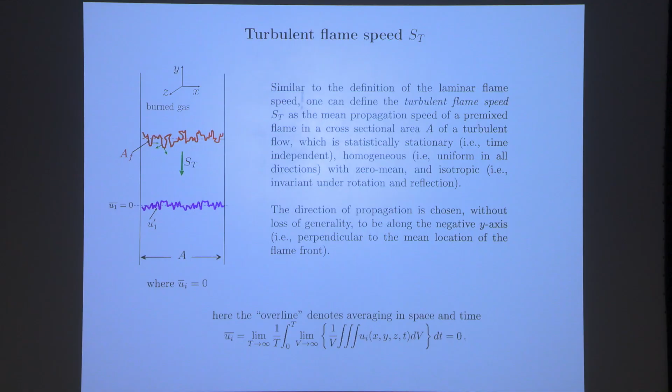So in a similar way as we define the laminar flame speed, which is the speed of a flame propagating in a quiescent mixture, where the entire structure is propagating at a constant speed, say SL, we want to define—and some of the earlier slides that I skipped raise the question—is there such a thing as the turbulent flame speed at all?

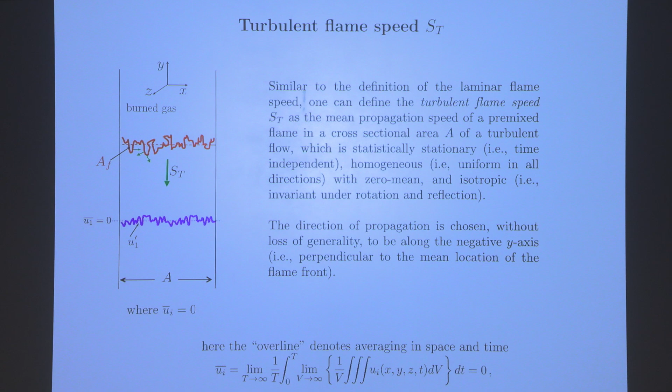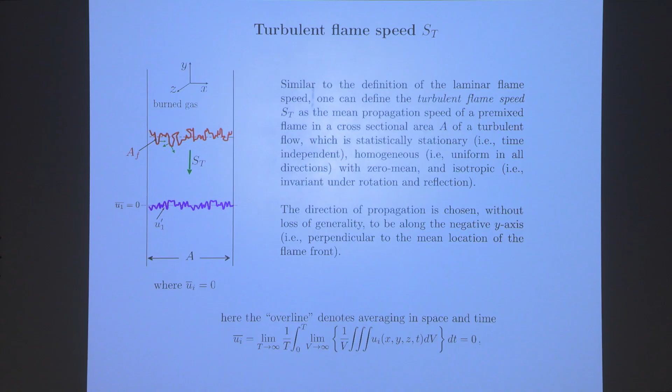But say there is, and there are some arguments given there. We want to define it as the propagation speed of a turbulent flame into something which is like a quiescent mixture for laminar condition, which will be a turbulent flow that has zero mean. In other words, it doesn't have a mean flow in the direction of propagation.

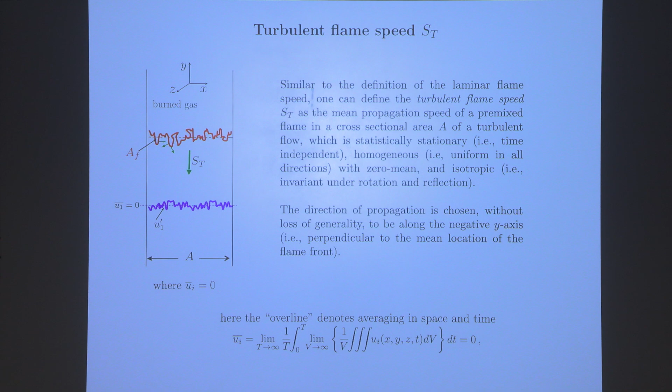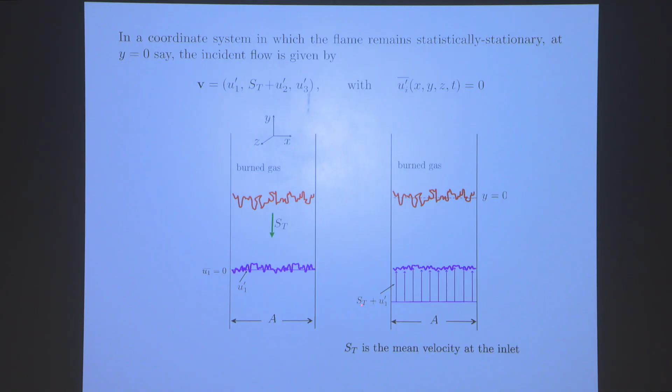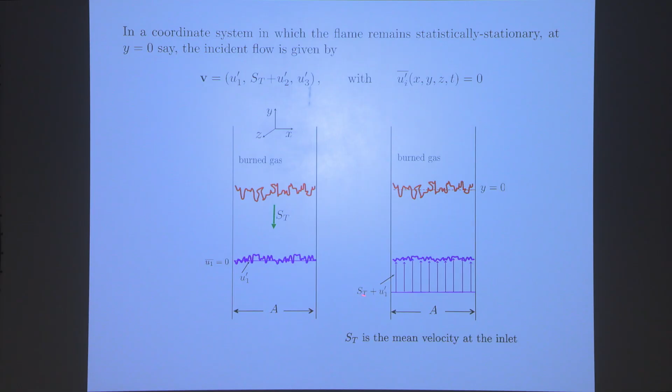And then, if that's the case, if the turbulent flame remains statistically stationary and propagates at some speed ST, we call that the turbulent speed. Or put it in a slightly different way: if the mean velocity of the incoming flow is ST, of course with some perturbation having zero mean, and if you retain the flame statistically stationary at some location y, then the mean velocity will be the turbulent flame speed.

The main idea behind which most hold up today about turbulent flame goes back to Damköhler. Damköhler, in fact, introduced the concept of turbulent flame speed and its scaling. He talked about small and large scale, and I'm going to skip some of the small scale and jump into the large scale.

So the large scale turbulence, or what we refer to as corrugated flamelet today—this is basically the idea that he proposed.

In this picture, where the turbulent flame is held statistically stationary in a cross-sectional area A, the incoming mass flow rate is the density rho u, times the area A, multiplied by some mean velocity, which is going to be the turbulent flame speed if this is held statistically stationary. So this is the mass flow rate. If this same mass is consumed...

...through this turbulent flame, then, since every section of the flame surface, say delta AT, propagates at the laminar flame speed SL, the total mass consumed is going to be the mean of all the segments delta AT—which is the mean of that corrugated surface—multiplied by the density rho u and SL, the propagation speed. So when you equate those two, you get that the ratio of the turbulent speed to the laminar speed is the ratio of the corrugated area to the cross-sectional area, okay?

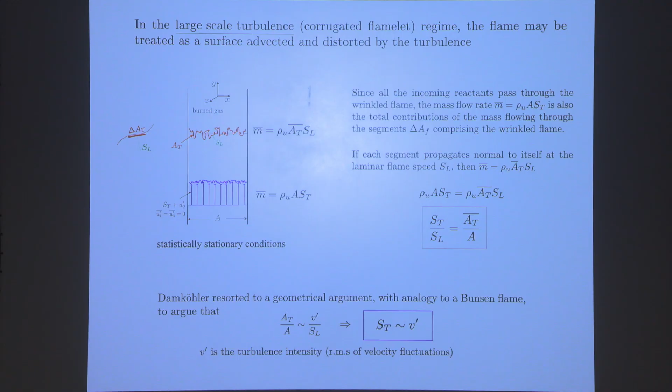So those are two points. Well, Damköhler went on to argue: how am I going to determine this in general? He made some argument based on treating every small segment like a Bunsen flame, and he tried to determine the area ratio, and he came to such a scaling.

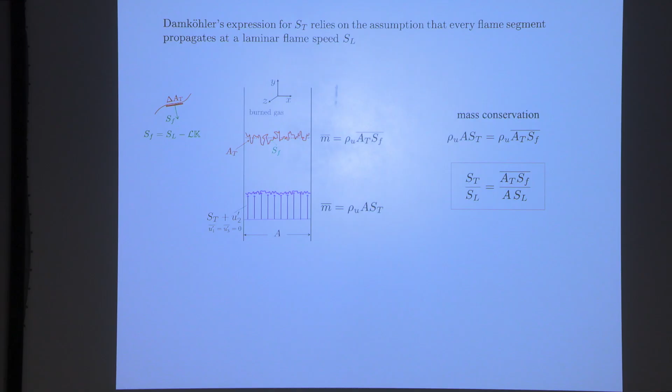And later on, Shchelkin had a different scaling. Again, I want to skip that, but what I want to say is that most of the literature thereafter tried to write the turbulent speed relative to the laminar speed, which is going to be some coefficient, of course depending on various physical parameters.

...and the turbulent intensity V prime, which is the RMS of the fluctuation velocity, relative to the flame speed, raised to some power. So for example, Damköhler's N was 1, Shchelkin said that under some conditions it's 2, some condition it's 1/2, whatever—that's the point. Okay.

I wanted to revise some of this discussion. So if we follow the same discussion as we did a minute ago for Damkohler, but now argue that the flame speed of every segment is not the laminar flame speed, but is affected by flame stretch.

So it's SF, not SL, which is affected by stretch. If you equate the two, the consumption of all those segments is rho u times the mean of the product of the area and the flame speed, which is not the laminar flame speed. Then the ratio of turbulent to laminar is the ratio of the mean of the turbulent area times the local flame speed, divided by the section here. Of course, if all segments propagated at the laminar flame speed, you obtain the Damkohler result.

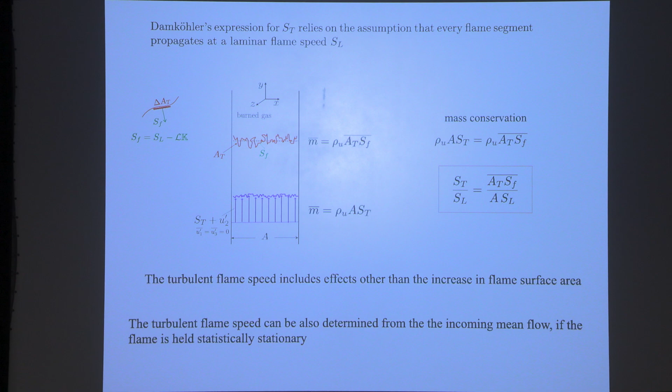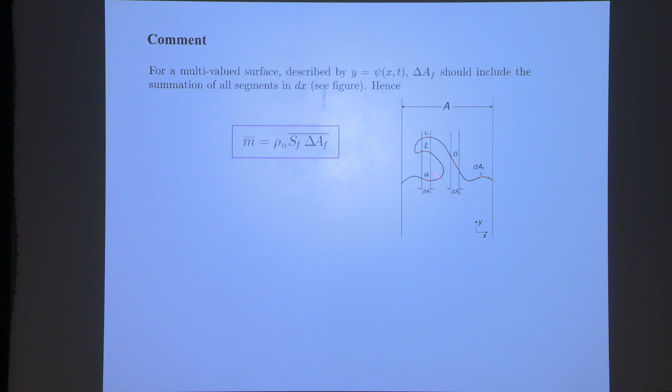Just a minor comment: if the flame is folded and so on, then when I add the different segments of the area, I have to account for the fact that for a given location, I may have more than one segment, and they have to enter properly in the calculation.

And again, I will rely on this same hydrodynamic theory. The flame is an interface, so the assumption is that the flame is so thin that the turbulence does not affect what's going on inside the flame. Is this reality? Not necessarily, but it's the model that we describe.

I am not totally convinced that it's always not the case. In other words, there is no definitive proof that turbulence affects the internal flame structure to the extent that it changes the turbulent speed tremendously. It may happen under some conditions, of course, and it's logical to expect that, but it's neither shown experimentally nor numerically that it does that. But anyway.

Different ways of arguing. In this model, then, we have the following parameters. We have the intensity of the turbulence, V prime. We have some turbulent length scale, L, which I will probably not talk about today much. And then we have the combustion parameter, which is the Markstein length and the density ratio, in this model.

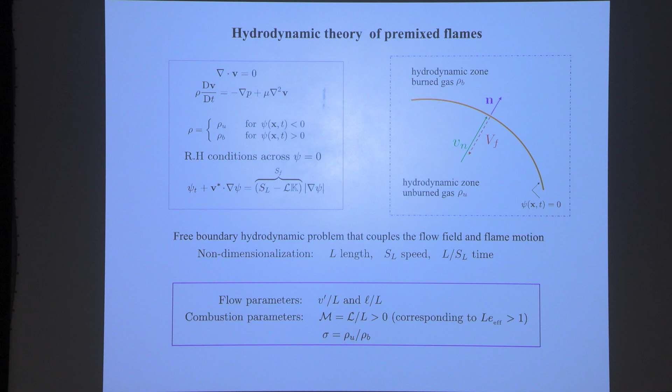Note, by the way, maybe again I failed to move on with different things, I didn't emphasize too much this. I did say, though, that the Markstein length is affected by different parameters. In fact, the nice thing about it is that it lumps all the mixture properties, diffusion properties, density ratio, into one number. That number can be changed by different things.

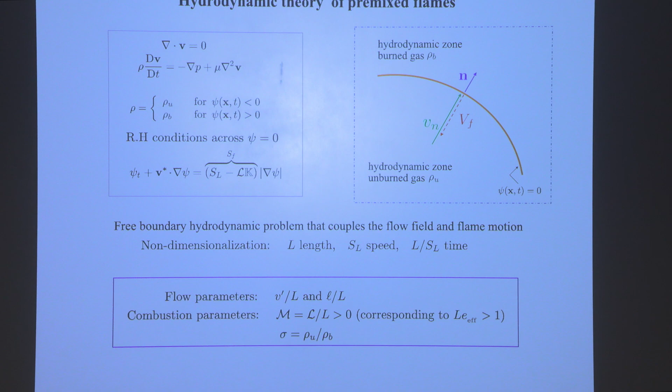So it's an important and interesting quantity, and people have measured Markstein lengths under different conditions. Some of the early ideas were that you can perhaps use them to describe a local structure of a turbulent flame, assuming that it's a strained flame, and you tabulate that, and use it as your small scale if you're doing LES or such calculation.

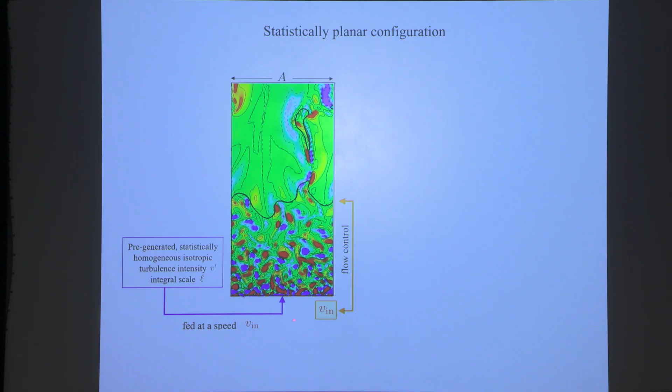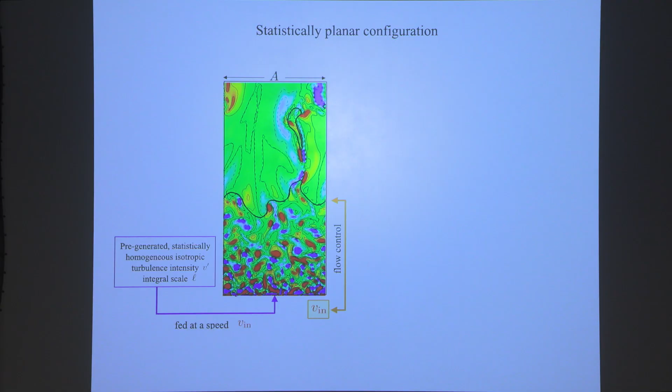So what we are interested in is a turbulent flow coming here with some feed, created independently, usually created in a long box. You create turbulence. There are different numerical methods to create synthetic turbulence, as we call it. You create a long box, and then you feed it, so to speak, into your box here at a certain speed, V inlet.

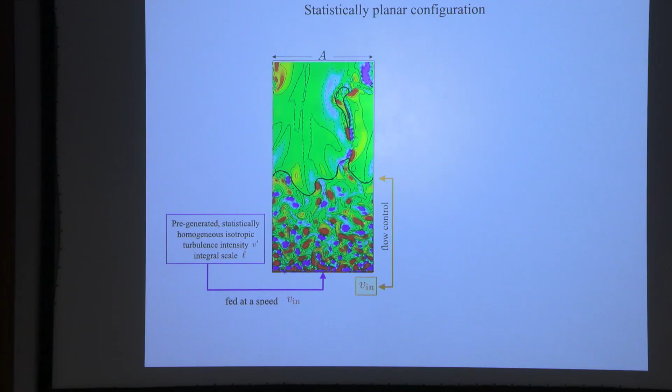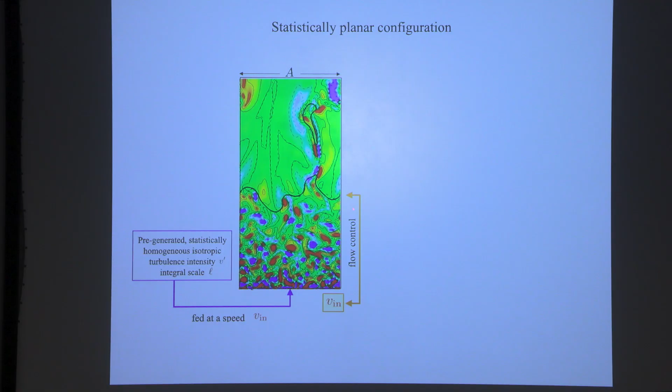And the idea is that with a flow control approach, we can control the velocity. In fact, we can also control the intensity of turbulence, which, once you generate turbulence, has an intensity and a scale, computed as part of what you have created. And you can control V prime as well with a controller.

So, for example, this is a PID controller. You see that V prime can be kept to whatever you want. This is the flame position for different V prime values. And you see that you can control it over time to keep the flame at a fixed position this way, okay?

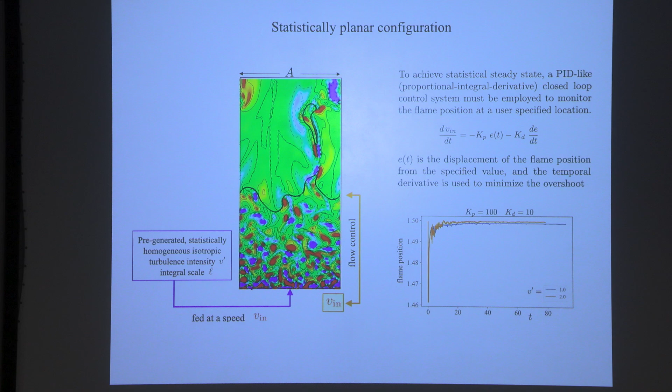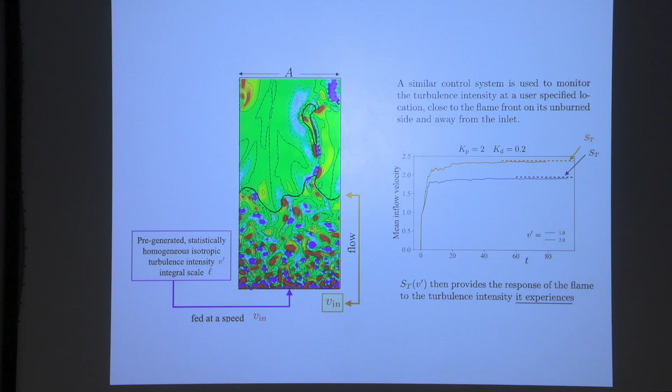By changing the inlet for different V prime, you can control the mean velocity, which eventually becomes the turbulent speed, using this controller. You can also do this in 3D, and this is the flame you can see in a 3D configuration.

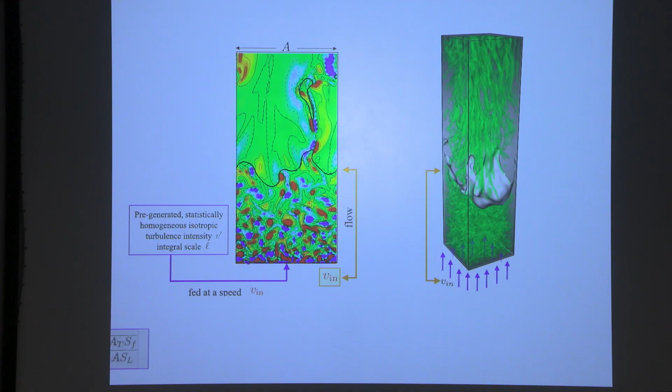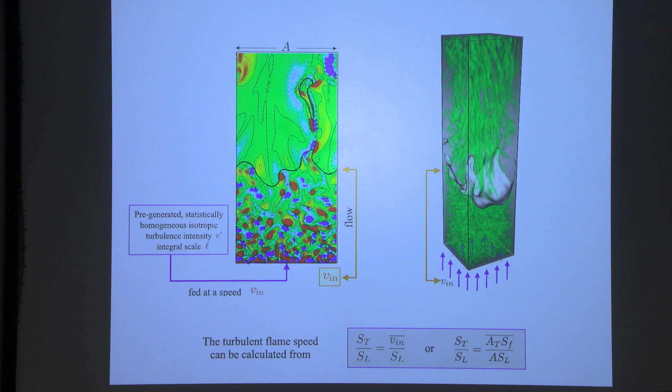So you can now compute the turbulent speed either as the mean inlet velocity, or by this relation. I don't know if I'll show a comparison, but all the results we got using this give more or less the same value—not identical, but basically the same. This is just to show what happened due to the turbulence.

What you see here is essentially the vorticity field, and it's not the entire vorticity—there are methods to show the important vorticity. I think it's called the Q criterion, for those familiar with it. My students know more about it, but anyway, this is the idea.

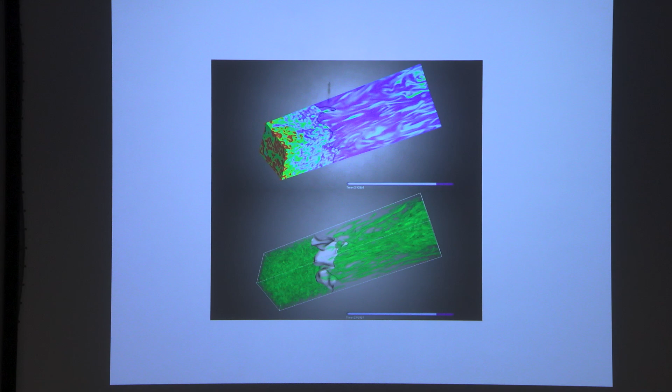The top figure and the bottom figure are the same, except the top one shows the shape of the flame—just the shape, rather than the entire flame, but the flame is the surface here. What I want you to see, and that's why I ran it again, is that the flame is often folded, and sometimes there are segments of the flame, unburned pieces, that detach. When it gets too folded, they detach. We were able to capture all this even in this relatively simple model.

Now I want to focus on a few things because I won't have time to do everything I want. Oh, my watch died. Okay, I'm looking at the time.

So I want to show you what happens for two different Markstein numbers with the same intensity. Remember from the discussion earlier today, a small Markstein number causes more instability—the flame is more unstable, right?

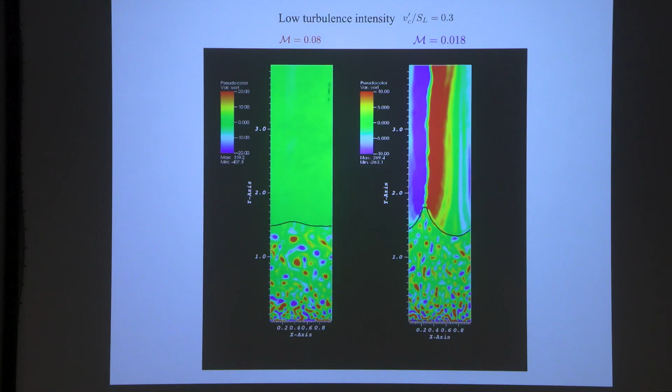So at 0.08, the flame due to the turbulence is slightly perturbed. But at 0.018, a smaller Markstein number, you see this cusp-like behavior, which is like the signature of the Darrieus-Landau instability—which is absent in this picture. And this is also true in 3D.

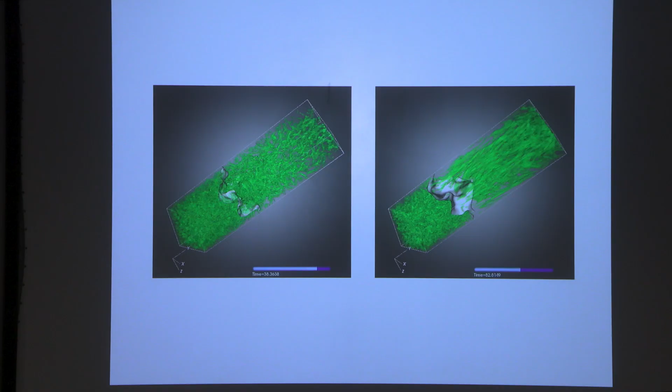It's not a movie, just to show you that the flame here is more mildly corrugated, and here it's more significant. So the point I want to make is the following.

Similar to what we've learned from stability theory, there's some kind of critical inverse Markstein number that separates a stable flame from an unstable one. There will be a similar effect on the turbulent flame, which I'll call subcritical and supercritical, but don't expect the stability criteria to be the same for the turbulent flame as for the planar laminar flame we discussed—though it's in about the same range.

This is a value from linear theory, where the inverse should be about 25. This is below 25, this is above. By the way, the numbers are big because the inverse tends to jump up, but as a Markstein number, they're usually relatively small.

What you see here is that overall, on average, at least at low intensity, it's nearly flat—whereas here it tends to have this cusp behavior that you'd expect due to the instability.

You can also examine the PDF of the flame position or curvature, and in this case it's more symmetric—the position. In this case, it's not symmetric, because of the intrusion into the burned gas, which makes the position more likely to be in one direction than another.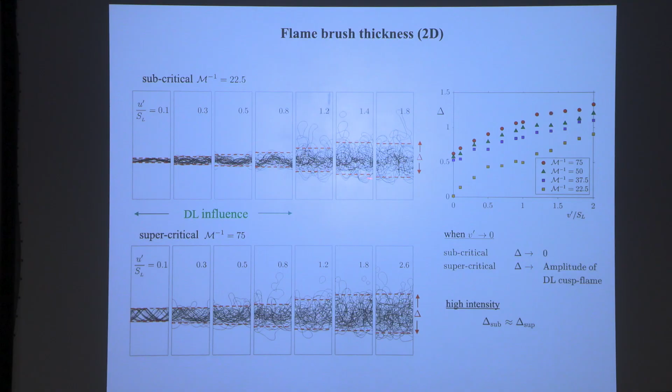When intensity is quite high, it seems like those distinctions try not to exist anymore. As you can see here, in the high intensity region, you don't see much difference between the subcritical and supercritical cases. And if you measure this flame brush thickness, delta, which you can obtain from the PDF distribution of the flame position, you will see that after a while, they tend not to be affected so much by the Markstein number. All the pictures tend to, well, if we could carry those calculations long enough, maybe they will tend to one constant. We don't have that, but they certainly tend that way.

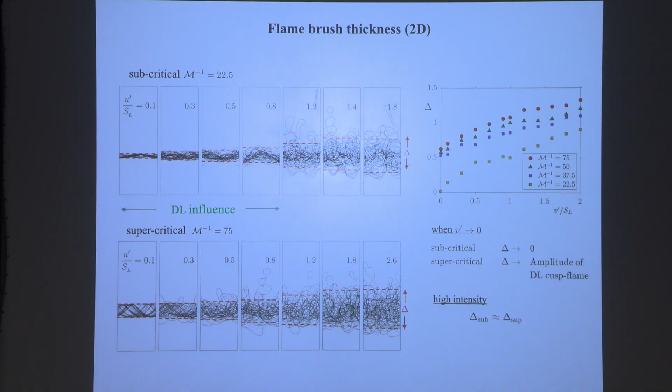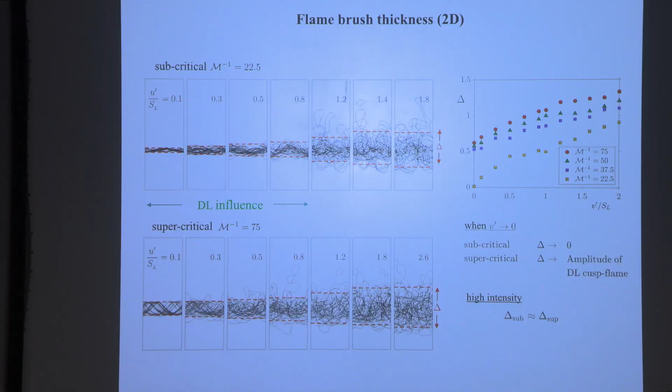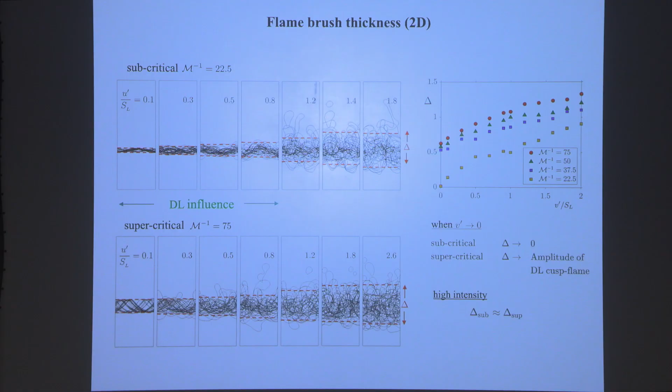But what is more important is that you see the subcritical case, delta goes to 0 when V prime goes to 0, because the flame, in the absence of turbulence, will flatten out. But in those supercritical cases, the flame never flattens out, because even when turbulence intensity goes to 0, the flame is unstable due to the Darrieus-Landau instability, so it will create a cusp. So taking the ratio ST versus SL is not really always appropriate. Maybe it should be ST versus the capital U that I used to describe the propagation of the Darrieus-Landau flames.

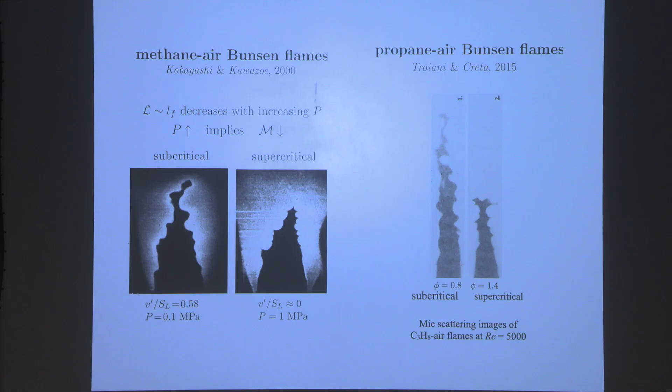This is just to show that you will get more curved surfaces for the subcritical case and more sharp cusps for the supercritical case. How do I distinguish between the two? It's the pressure. Remember that the Markstein length is proportional to flame thickness. You increase the pressure, you decrease the Markstein length, so you make it more unstable. And even though V prime is small, nevertheless, the pressure is high, so this is more hydrodynamically unstable. Similarly on the right, and this also.

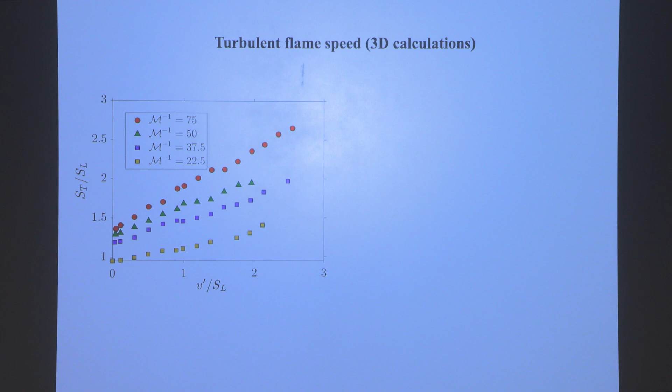So the turbulent flame speed that we calculated also showed the same effect I mentioned before, that as you go to small intensity, it's not only the flame brush thickness that doesn't go to 0, but also the speed goes to a value which is more related to the propagation of the cusp-like Darrieus-Landau flame. So one can refer to this as a Darrieus-Landau enhancement in the turbulent case. And if we scale ST with UL, not with SL, UL being the propagation speed of the cusp-like flame, then you see they all go to 1 as expected.

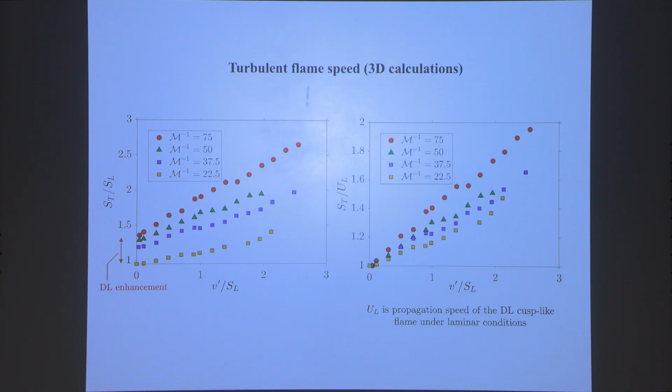So it seems that at least what I promote is that this scaling is perhaps more appropriate in this case. By the way, some of these results are 2D, some are 3D. Of course, 2D is easier than 3D. But here's another point I want to make: if you graph ST, the turbulent speed, as opposed to the area ratio, you will find that they don't align with a straight line. They are proportional, but they are always below, indicating that the area ratio overestimates the turbulent speed.

Again, it's a comment on the original result of Damkohler. So if you write the ratio of the turbulent speed as I suggested earlier, and if this mean can be written as the mean of AT multiplied by the mean of SF, which is strictly speaking not necessarily correct, but it's approximately right and was verified numerically, then what you get is the area ratio, but also multiplied by a coefficient which results from stretching. So this stretching effect for Lewis number bigger than 1 causes a reduction in speed relative to the area ratio.

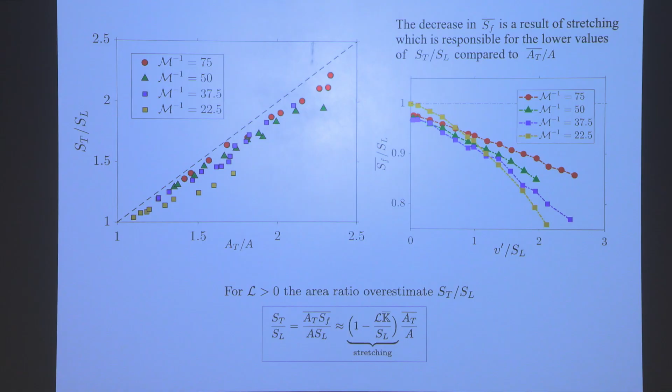As you notice, I never said anything about Lewis number less than 1. Now, Lewis number less than 1 is very interesting, I know—many people work on this because it's like clean hydrogen. If the theory was completed, it would have led to sufficient guidance for numerical simulation. But at the moment, I know there are some groups trying to identify this in different ways, but I will not talk about it more. So anyway, that's why it's limited to L positive—positive meaning Markstein length positive, which is equivalent to Lewis number sufficiently bigger than 1.

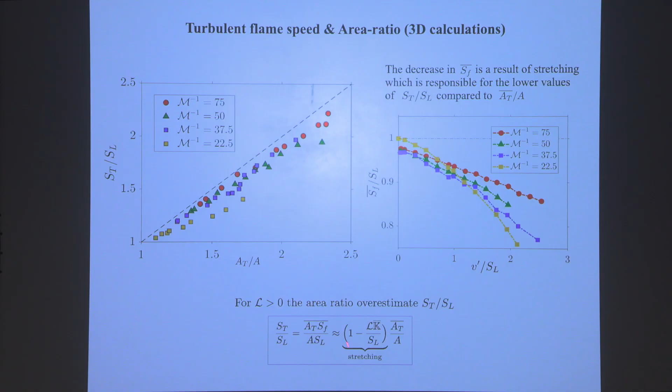So the stretching effect causes a reduction, so the area ratio under such conditions will overestimate the turbulent speed, if you just measure that. Here you can see the mean flame speed relative to SL, which is basically a result of the stretching, or this term here, presented for different Markstein lengths. And here you see the mean stretch of the turbulent flame, and you see how the mean stretch increases with intensity.

In fact, it's an interesting comment—some of the early calculations have suggested that curvature is the more important factor, which is not true. Well, at least I am convinced by my calculation. It turned out that the effect of curvature is not as strong as the effect of straining, okay? And I don't remember what came here. Here it is—you see how the curvature effect increases for increasing intensity, whereas strain shows a more significant effect on the flame. This is the straining effect for different Markstein numbers, and this is the comparison between curvature and strain.

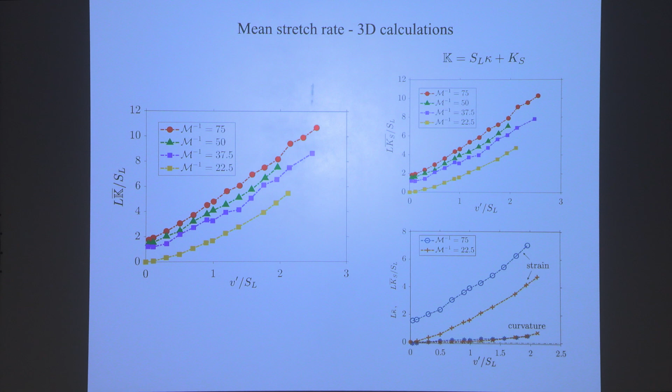One more item I wanted to discuss, and perhaps I will more or less summarize there. So this is taken from 5 consecutive time calculations of the turbulent flame. It was taken in 2D. So delta T is very small—T1, T2, and so on.

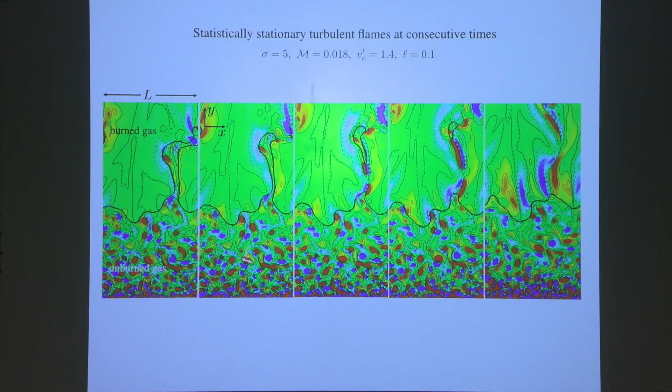You see the creation of a pocket: first a flame that gets folded, then it pinches, then it separates, and then part of the pocket of unburned gas burns and disappears completely. That's what you see here. Now this is the same, but with more time steps in between. What I want to show you is the flame area up to the pinching, and of course there is a drop as a result of that because there's less area. Not only does the folded area increase the area, but also the pinched area does. But there is also a drop in the turbulent speed, okay?

And when this happens very frequently, you would expect that the turbulent speed will slow down. It is a possible explanation for the leveling of the rate of increase of the burning velocity at high turbulent intensity, something known as the bending effect.

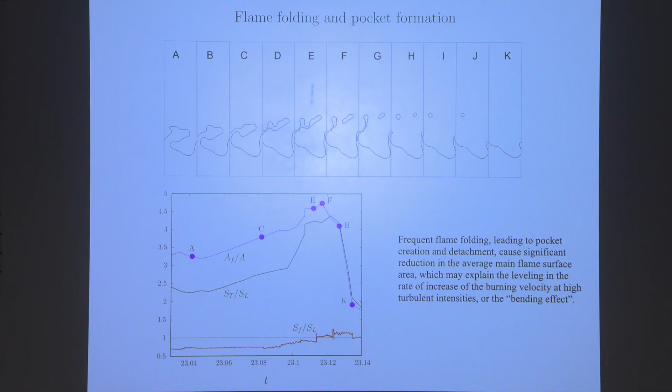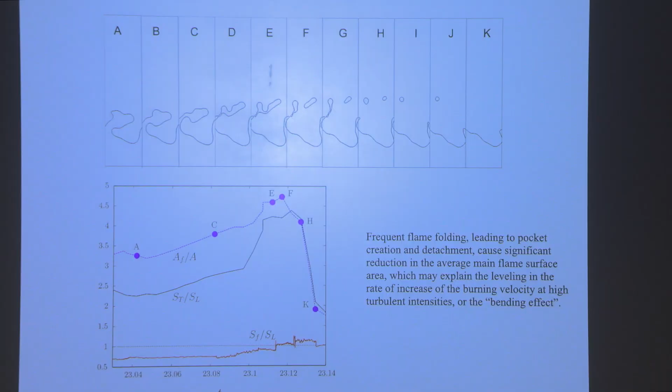I didn't show you the introductory comment today, but basically people believe that generally speaking, the turbulent speed tends to reach some kind of leveling, and this is known in the literature as the bending effect, okay? It doesn't keep on increasing despite the intensity being larger and larger. So it seems that this may provide an explanation: at high intensity, you'll have more folding and more of this pocket formation, and therefore there'll be more and more drop of the turbulent speed, and possibly it will level it off.

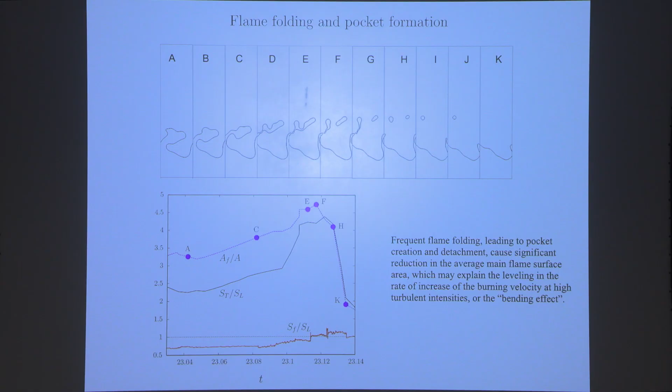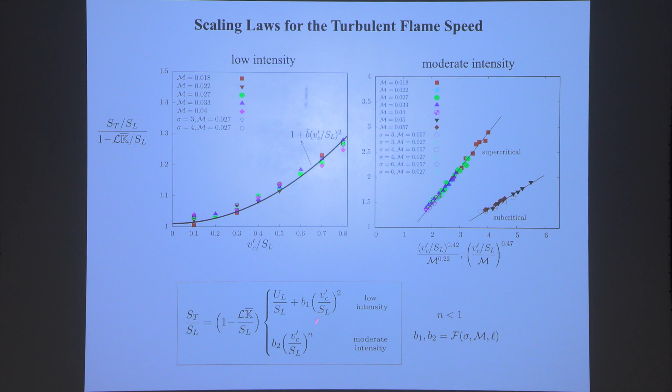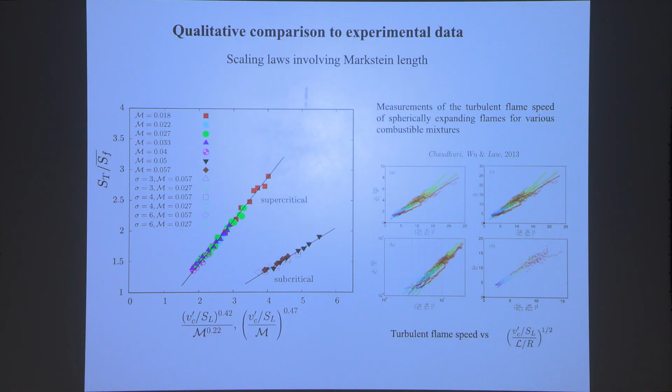Some comparison of scaling laws that were proposed in the computation. Note that they also appear as V prime to some power. There is a stretching effect, and we distinguish between low intensity and moderate intensity. I didn't discuss high intensity because it affects flame thickness and isn't really compatible with our model. But you see there's a difference there, and some experiments show a somewhat similar trend. The numbers seem not too far from each other. So that's really what I wanted to show.

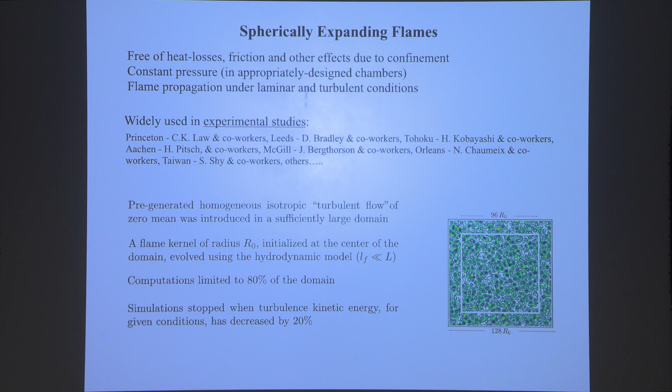There's also a bit of discussion of spherical flames that we did. Now the picture is different. You create turbulence in some box, but limit your calculation to a smaller box so that the effect of the boundary doesn't play a role.

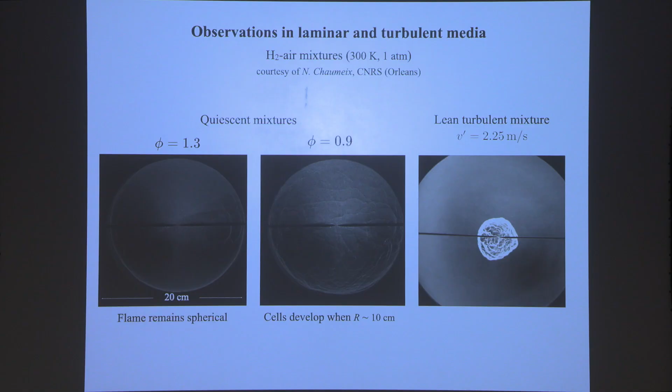This is more observation. This is laminar condition, showing cellular forms. Again, laminar condition. And this is under turbulent condition, with significant intensity.

I will rush this quickly, but you can see different behaviors. In low turbulence intensity, you see a lot of cell splitting, like in the laminar condition. So the flame appears laminar, but is driven by Darrieus-Landau instability.

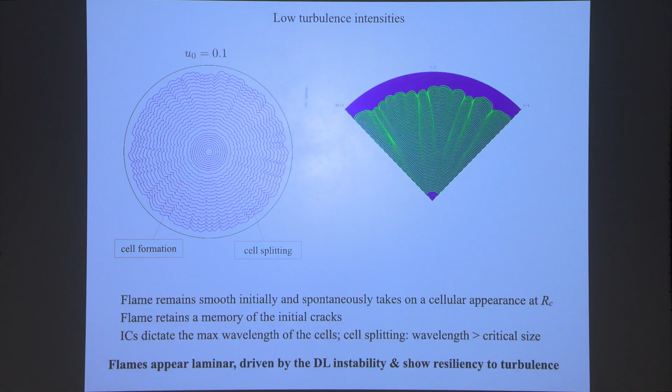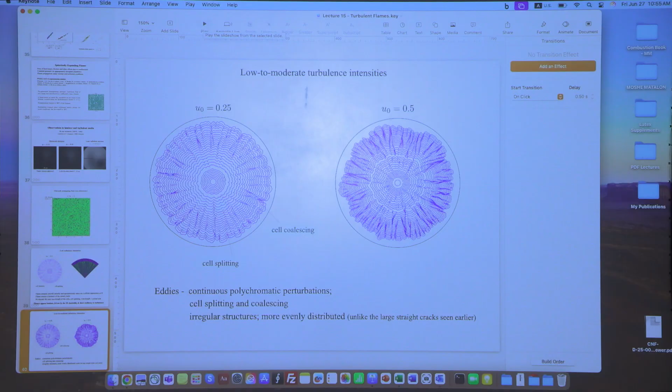And in fact it shows a little bit of resistance to turbulence. And then it shows more splitting and coalescing of cells. Then you see the higher intensity case - here U naught is the intensity. The higher intensity case shows behavior similar to what I showed you for the 2D case, formation of those cusps and so on.

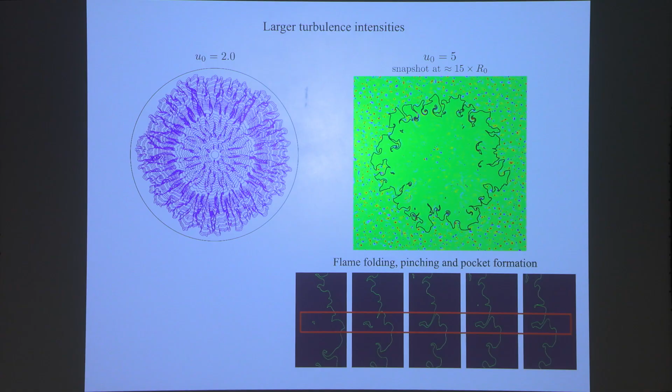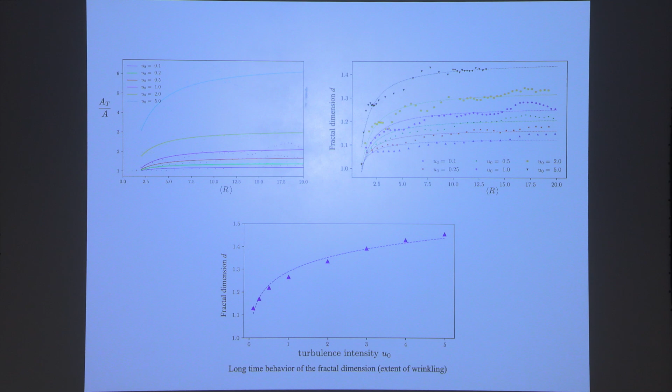Okay, I want to try to summarize things. I know I added too much material. Almost at the end now. I wanted to point out here that there are some interesting aspects that one is able to discuss with simplified theory.

We were able to argue that ST over SL is not necessarily AT over A - there are effects of stretch that play a role. We were able to discuss the effect of curvature versus strain on turbulent speed, and the fact that when you reduce the intensity, things don't simply go to laminar and planar flame. I showed a few examples where Darrieus-Landau instability plays a significant role, at least in the low intensity limit, because at high intensity turbulence is stronger and those effects get hidden.

So it's almost the end, because the end brings me to share some comments from a philosopher and psychologist, known apparently for the book Principles of Psychology. What does it say? The first response to a new theory is that the ideas are wrong. If you do a constant density approximation, they'll tell you it's nonsense - combustion is not about constant density approximation. That's just one example. Later, when the ideas are found right, the response is that they are unrealistic or insignificant. And finally, when they all say the idea is probably right and important, they say: oh, but they were already known.